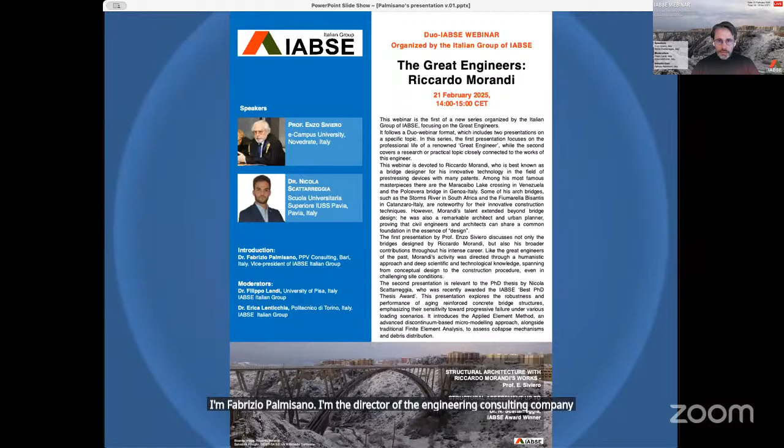The topic of this webinar is great engineers, and we will talk about Riccardo Morandi. This is the first of a new series of webinars organized by the Italian group of IABSE focusing on great engineers. The format is the so-called duo, so we will have a couple of presentations: the first relevant to the works of a great engineer, Riccardo Morandi, and the second relevant to a topic strictly connected to great engineers.

Today we have the pleasure to host Dr. Nicola Scattareggia, who will talk about his PhD thesis, which won the IABSE award for best PhD thesis in 2024. We also have the honor to host Professor Enzo Siviero, who will talk about the works and life of Riccardo Morandi. I will give you a short introduction of IABSE, and then I will leave the screen to the moderators, Dr. Filippo Landi and Dr. Enrica Lenticchia from the IABSE Italian group.

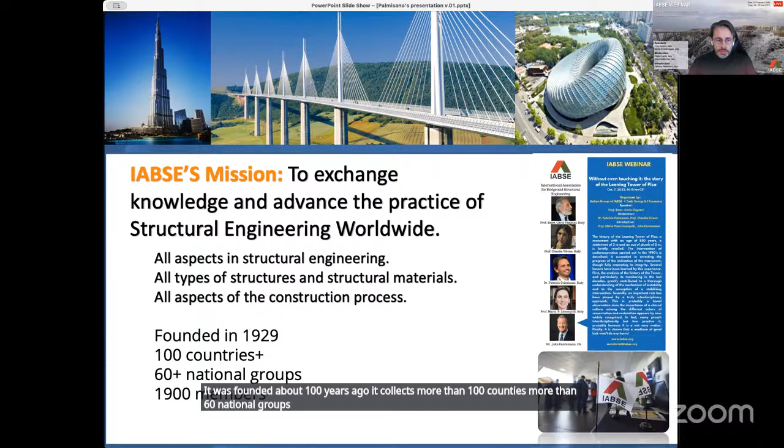The IABSE mission is to exchange knowledge and advance the practice of structural engineering worldwide. It covers all aspects in structural engineering, all types of structures and structural materials, and all aspects of the construction process. It was founded about 100 years ago, and it collects more than 100 countries, more than 60 national groups, and about 1,900 members.

The objectives are to promote cooperation and understanding among all concerned with structural engineering and related fields through worldwide exchange of knowledge and experience, to encourage awareness and responsibility of structural engineers towards societal needs, to encourage actions necessary for progress in structural engineering, and to improve and foster cooperation between organizations having similar objects.

This is a global association which has a local presence in national groups, and as I said before, we have more than 60 countries all over the world.

This webinar has been organized by the Italian national group of IABSE, the so-called IABSE IT. It was refounded almost 3 years ago, and its main activities are to coordinate new technical Italian task groups to discuss specific topics, to disseminate activities of the task groups in the journal of IABSE, in the bulletins, workshops, special sessions at IABSE conferences, and to have training activities such as this webinar, conferences. We've had our first conference last October, and technical visits.

The heart of the International Association is the so-called Technical Committee, who is responsible for the overall technical activity of IABSE and coordinates the committees relevant to the outstanding structure and paper awards, the commissions, the SEI editorial board. SEI, Structural Engineering International, is the official journal of IABSE, the bulletin editorial board, the Young Engineers Committee, and finally the new founded IABSE Academy.

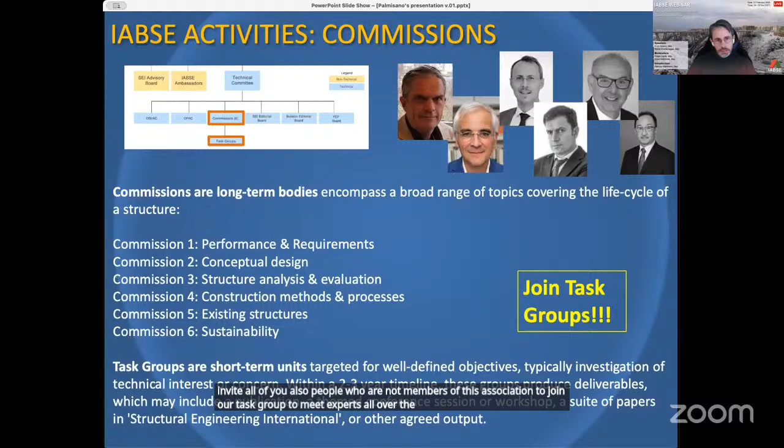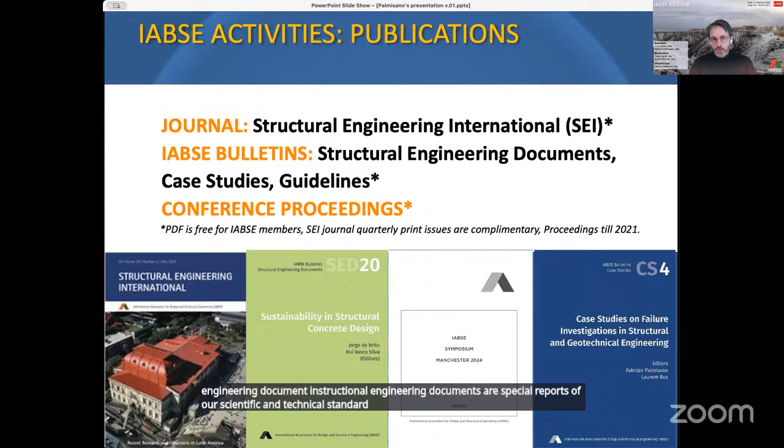IABSE has three kinds of main publications. We surely have conference proceedings, but also the official journal on structural engineering called Structural Engineering International, where we can find not only technical papers but also valuable scientific papers. We have IABSE bulletins, guidelines, case studies, and structural engineering documents, which are special reports of high scientific and technical standard, focusing on advancement in structural engineering.

On the IABSE website, you can also find the IABSE learning platform. For the time being, it is divided into 5 parts: one relevant to webinars like this, keynotes, lectures and courses, reports, and toolbox. IABSE is reorganizing the entire platform and adding some special courses that will be delivered, I hope, this year.

One important activity of IABSE is to disseminate the knowledge of structural engineering through the Young Engineers Program. The scope of this program is to liaise young engineers with conference organizers, advocating for IABSE through social media, and facilitating opportunities to bridge budding engineers with experts among the IABSE fellows.

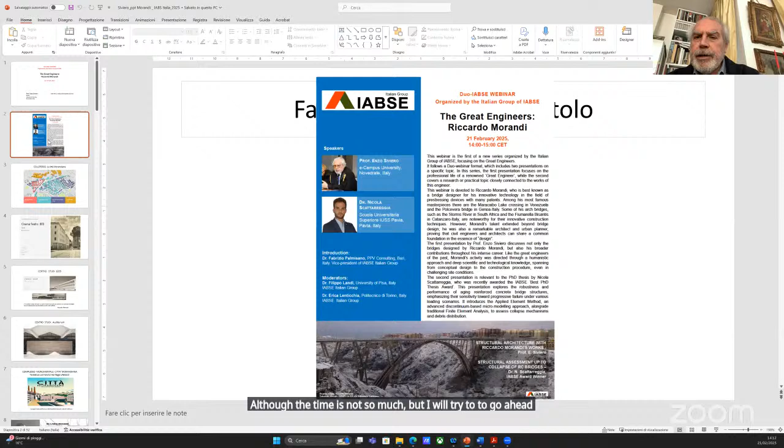Yes, you can go for the first slide. Riccardo Morandi is one of the most important bridge designers all over the world. Nobody knows, or few people know, that Riccardo Morandi was also an urban planner, and this is in Colleferro, what we call the Morandian city. I'm sorry because I had no time to translate it into English, but I would like to show with a few slides what Riccardo Morandi made in the field of buildings and urban planning. He was a kind of architect at that period. He worked between the two wars.

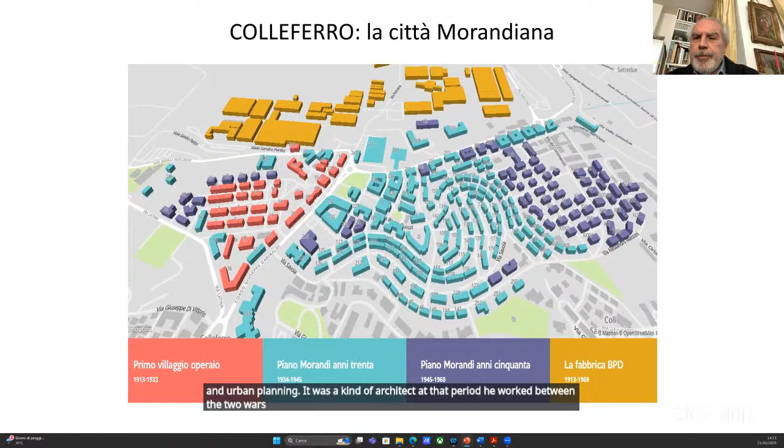Please go. This is just a cinema, a theater for Bombrini Parodi Delfino, which was a very important company. For this company, he organized a kind of worker housing for people to let them live in connection with the factory. He was also making some work during the war, and this is another problem.

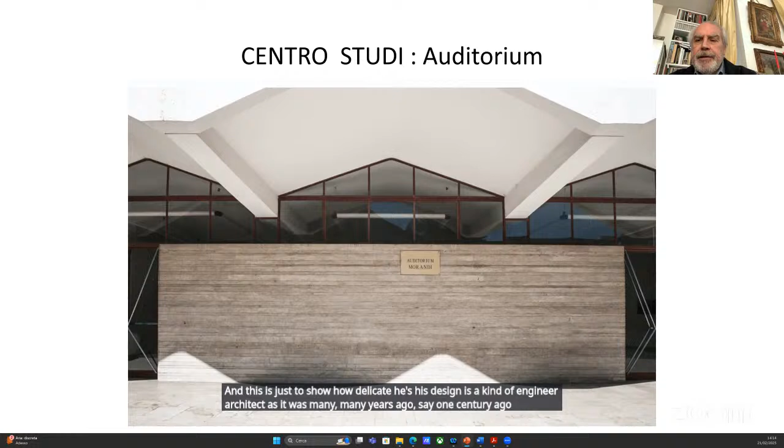Please, I would like to show some of the buildings he was making just right after the war. I don't enter too much, but during the war he was working so much. Next time, next please. This is just to show how delicate his design is. He is a kind of engineer-architect, as it was many years ago, say one century ago. After Nervi, I think Morandi is the most important one in Italy, together with some others, of course.

Next, please. Città Morandiana is now in the tentative list of World Heritage, so its importance for the social situation of the building is to be recognized. But the most important one is just...

Bridges. I show you some of the bridges he made in his life, please. This is Riccardo Morandi, he was sketching by hand, you know. This is also very important: when you design by hand, it means that your brain goes directly to the sketch. This is one of the sketches, please.

Another one is Riccardo Morandi. He was very old, with a bridge in Rome. But on the right-hand side, you have this Bisantis Fiumarella bridge in Catanzaro, which is also part of this seminar.

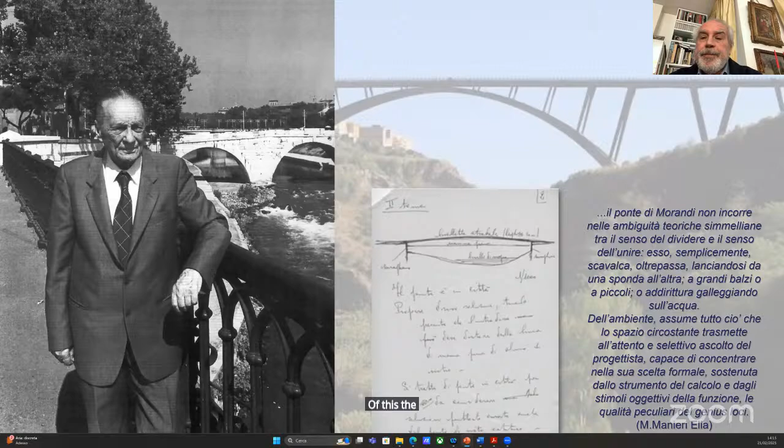This is the first bridge he made in South Africa. You see that the arch has something very peculiar because the standings are not vertical but somehow inclined. This gives an additional safety situation, but at the same time an architectural feature which is very nice.

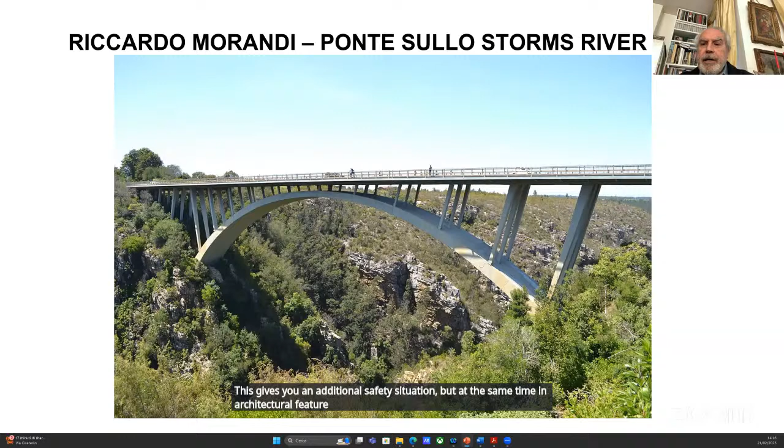You see here how he was building the bridges, because concrete arch bridges at that time needed scaffolding, which was very important. But in that case, he prefabricated the semi-arch and then inclined it, as you see here.

I have no time to discuss, but of course all these things without the instruments we have now and the possibility we have with computers was a very difficult task, because everything was almost made by hand. This is almost 60 years ago.

Another bridge is this one, which is a footbridge. Again, he worked with the semi-arch, moving from one side to the other. The form is a parabola, of course. You see on the right-hand side the bridge as it is finished.

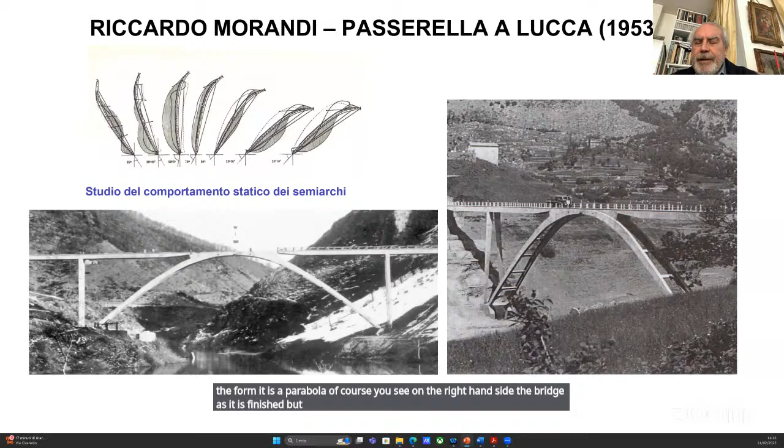What is interesting is that even when the water is there, you see the impression of the bridge is somehow very natural. This is one of the most important features of the design by Morandi.

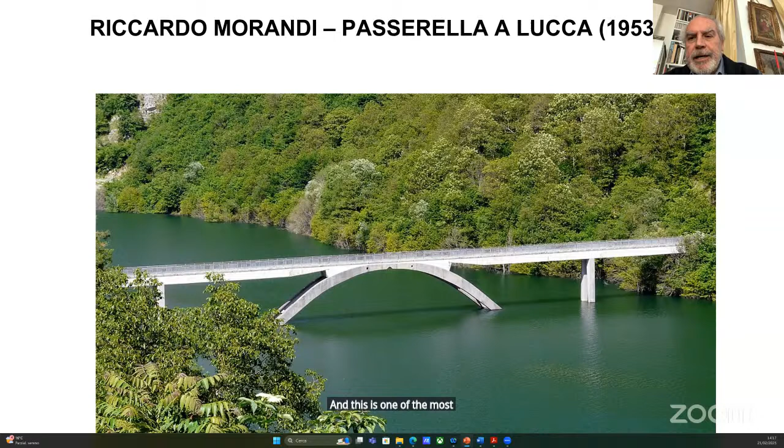You have here the Fiumarella, or Bisantis. Fiumarella is just the river underneath, and Bisantis is the person who promoted this bridge.

There are a lot of features we can discuss. One for us: you see the X elements, which are able to reduce the slenderness, and this is also something very important from an architectural point of view. At the same time, the structure shows the combination of engineering and architecture—I always say a bridge between engineering and architecture.

I myself have been dealing with this for 40, 50 years. Other views—I have visited this bridge a lot of times. I would say Catanzaro town is more important because of this bridge than for other features.

Just to mention how the arch is attached to the abutment: you have a bifurcation of the elements, and this shows also the bending moment organization, which is tension and compression. This is for my students—I was teaching bridges to architects, so I had to speak their same language.

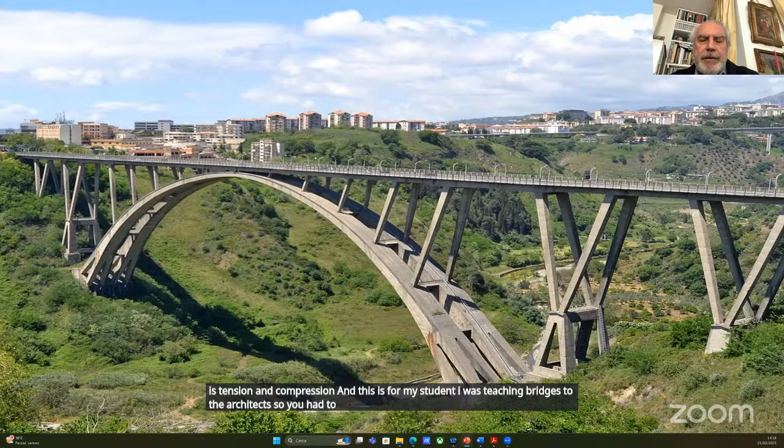You see the scaffolding, which is also a work of art—very important, a piece of art. Even the scaffolding, sometimes the execution is more important, during the execution, because nobody can organize in a very easy way the behavior of the bridge.

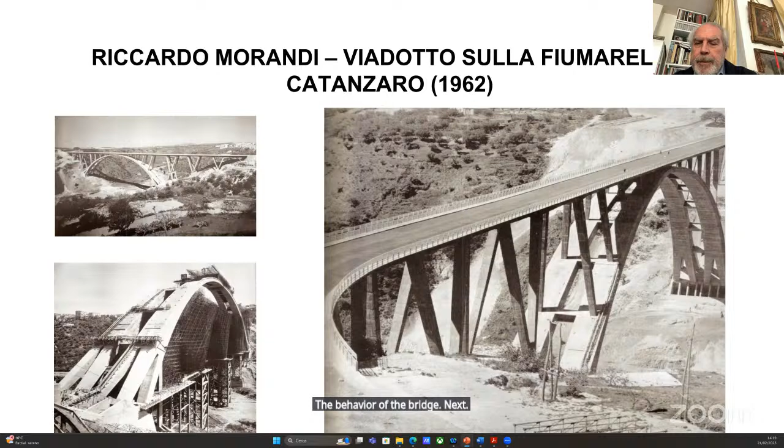Here you see details of the scaffolding, which, in my opinion, is like a picture. It's fantastic, I like it very much, because site work is, in my opinion, a very important feature. Every structural engineer should know how it works, how to erect things, and how the behavior is during construction.

This is maybe one of the most important bridges that Riccardo Morandi made. At that time, we are talking about around 60 years ago. The Italian contractors were working all around the world, and Morandi was working for the contractors.

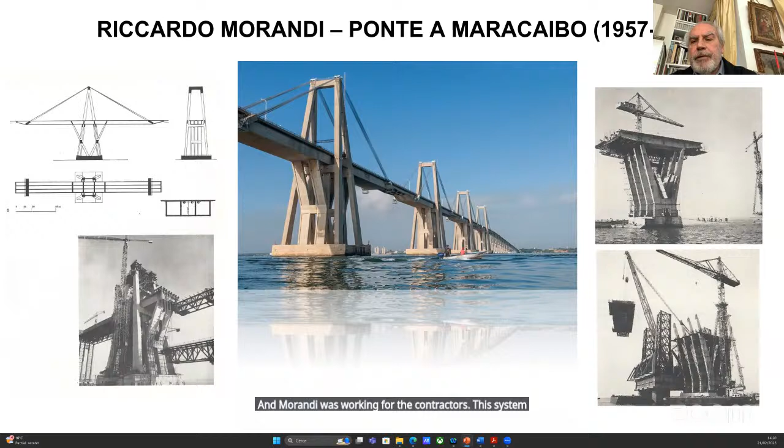This system is a peculiar situation of Morandi. Laguna, Maracaibo Lagoon—in that case, you have the cable stays, which are steel.

In other cases, we see he used steel, but embedded in concrete. This is a peculiar situation which gives some problems, of course, but at the time it was very, very cheap.

And we come to the Polcevera Bridge, which is well known not only because Genova calls it their Brooklyn Bridge, although there is nothing to do with Brooklyn, but because it has been demolished a few years ago after the collapse of that part. I said at the time that it was a murder of a bridge, because there was no real reason to demolish it.

This is another bridge, in Libya, in Cyrenaica, in Wadi el Kuf, which I know very well because I visited many years ago. It is the same system, but a little bit more span—it is 250 meters.

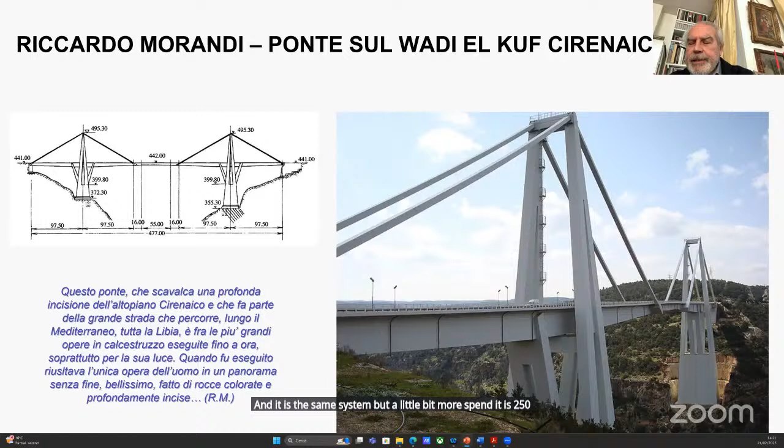A picture with color, because the sun is illuminating it, and the result is this one—it's a kind of monument in the landscape.

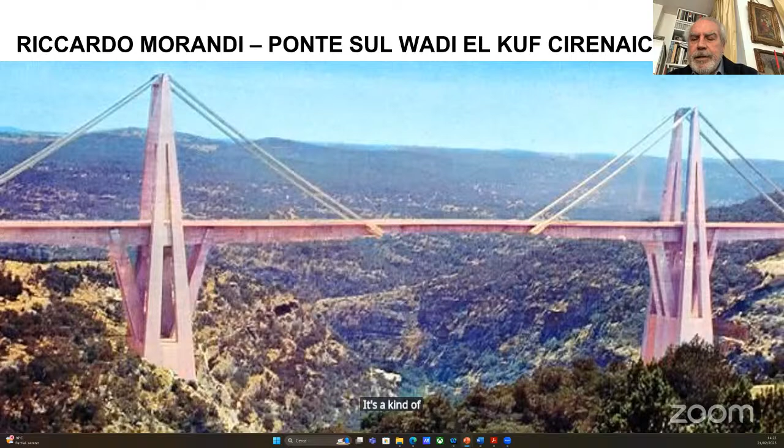You see the system: it's the cable in steel, then embedded in prefabricated elements in concrete, and then pre-stressed. This gives some problems for the injection of the mortar and so on.

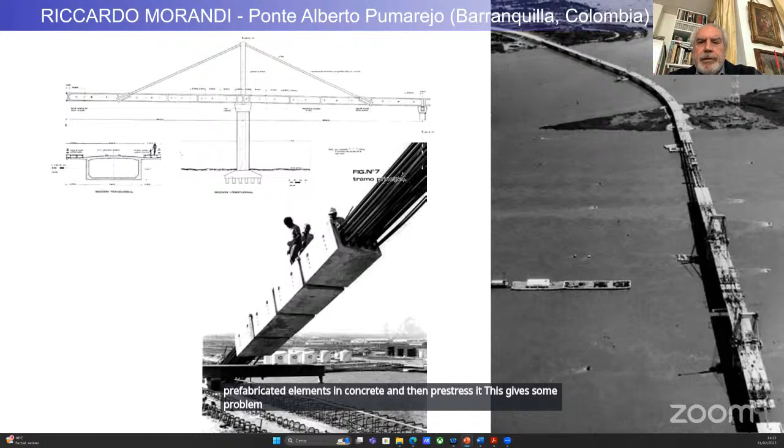Now we come to Polcevera. How was this built, I mean? This is the illustration in the newspaper when, in '67, it was inaugurated with the president of our republic at that time, Saragat.

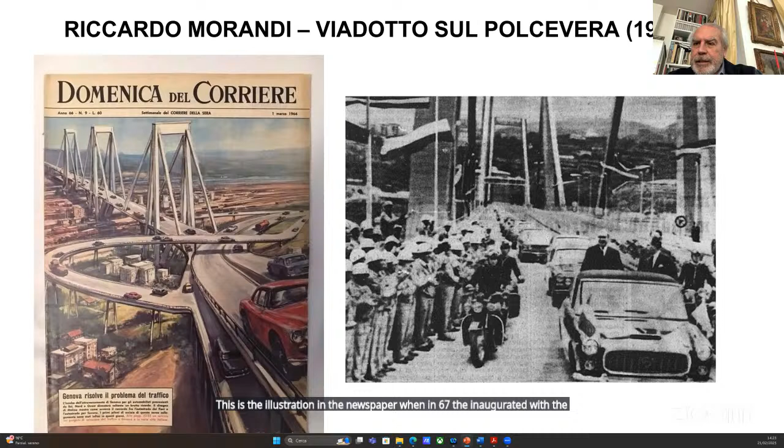Some detail, which is very peculiar, because there is not only the main span of more than 200 meters, but also an additional span of 70 meters approach with this V shape, which was unfortunately very interesting. The whole bridge was more than 1 kilometer, half with this so-called Morandi system, and half with this V shape, with elements partly prefabricated, partly cast in situ.

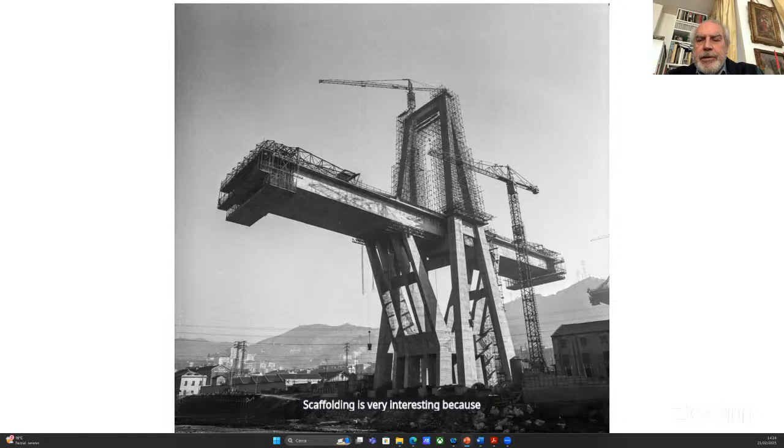Scaffolding is very interesting because initially it was only cantilever, without the tie elements.

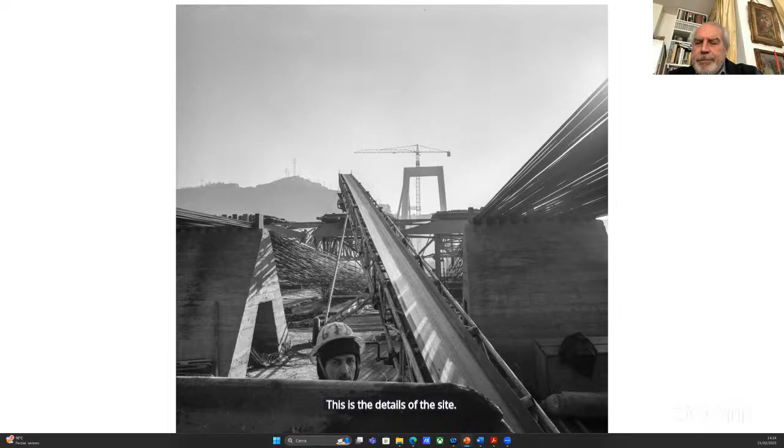I won't comment too much, I think we should move on quickly as time is running. These are details of the site work. Also problems with the concrete. This is the final design before.

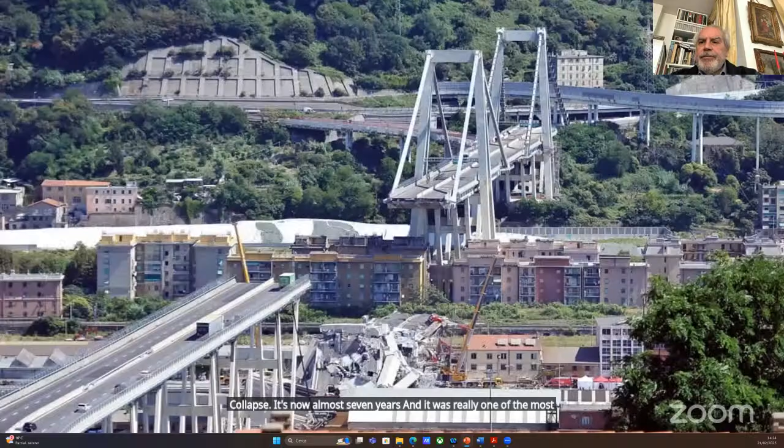We proposed to close the part which had collapsed.

I imagine this like Michelangelo's Creation, where you have the two fingers connecting, and this finger accepting another connection. This is our idea: the V shape, we change into another V shape to connect on the other side with the reverse V shape.

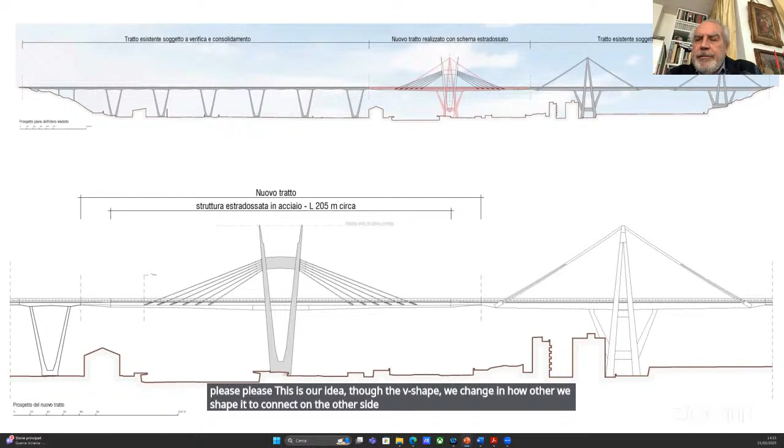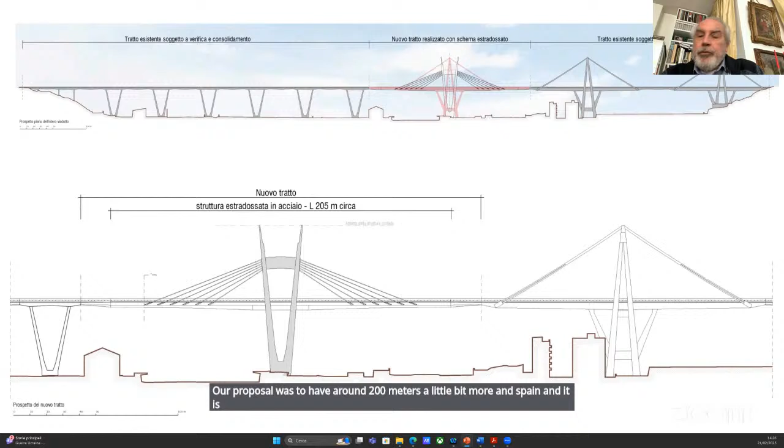Our proposal was to have a span of around 200 meters, a little more. We used steel, of course, because it was not possible to replicate the situation from 50 years ago.

I tried to condense this - it was for us something to show the transition from one part to the other, because my attitude personally, and what I teach my students, is mainly to devote an important part to the venustas, meaning the beauty of bridges, the architectural feature, design, landscape, and so on, not only the structural engineering. I know that in IABSE there is also quite a lot of attention to conceptual design, and conceptual design should not only be a structural design, it should be holistic, all together.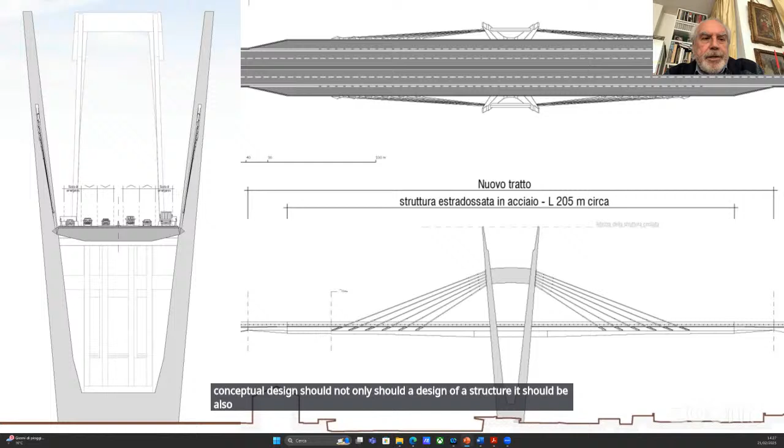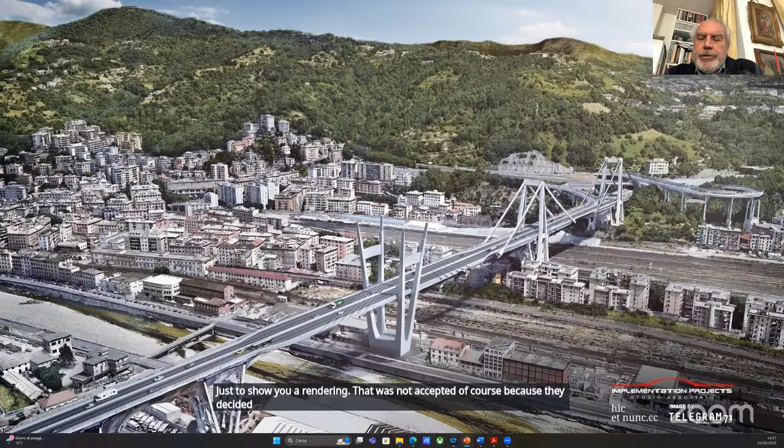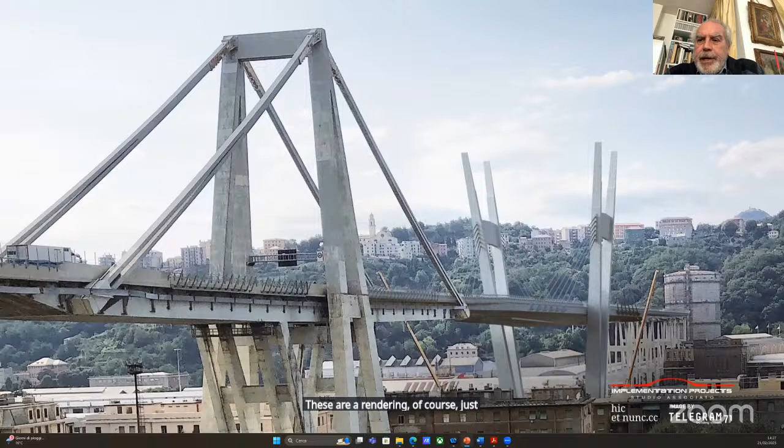These are renderings, just to show that we can combine one part with the other, so it would be considered at least as a kind of comparison. But the political decision was to demolish the bridge. Therefore, we made this effort just for history, for glory or not glory, I don't know.

Anyway, you can judge. And I think the most appropriate place to discuss this is IABSE. This is my point of view.

This is also very interesting because you open the arms, it seems that you are praying to God that nobody can repeat this.

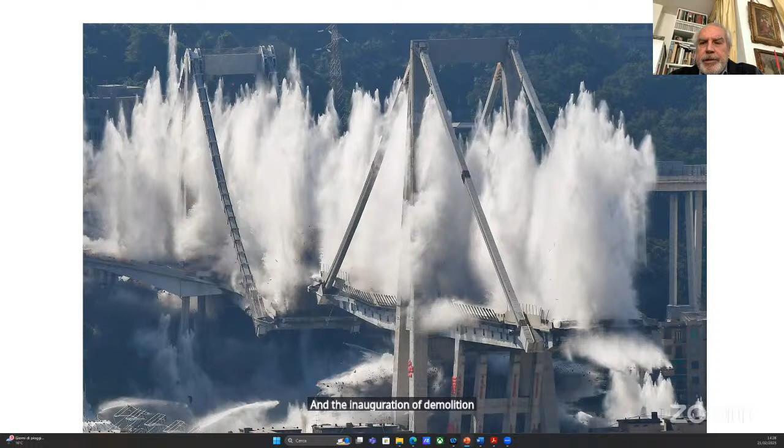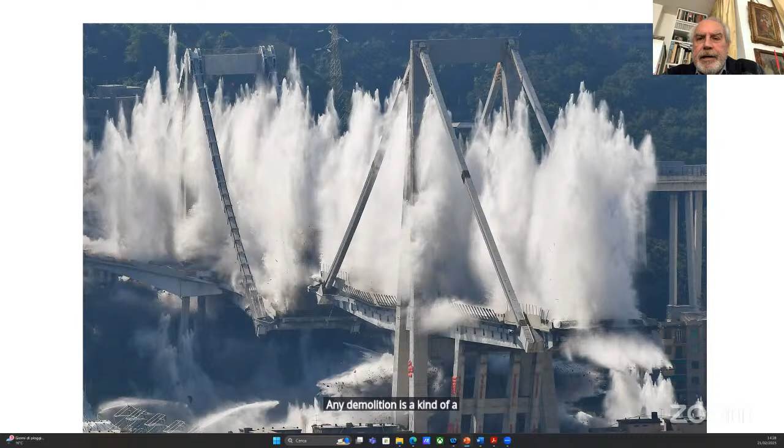This I worked on with my co-worker. This is what they finally found. They demolished the bridge, and the inauguration of the demolition by the politician was, for me, a kind of bad impression. Any demolition is a kind of losing our life, our heart. And this is the proposal of Renzo Piano, the original one.

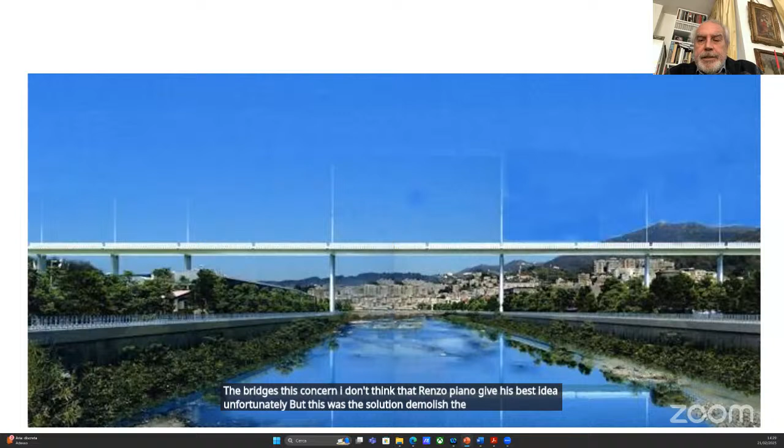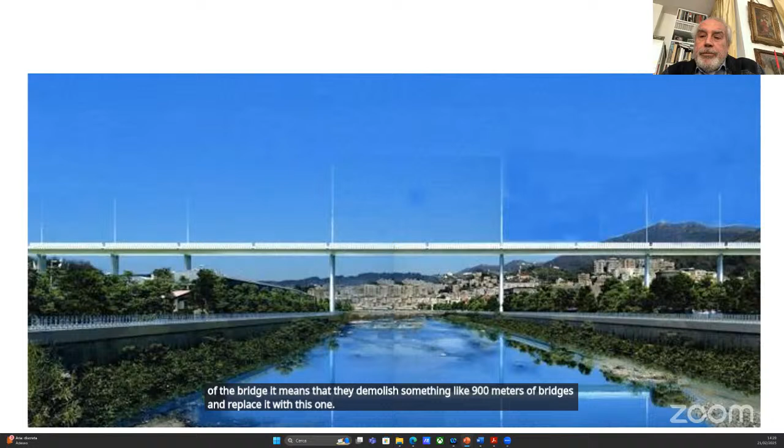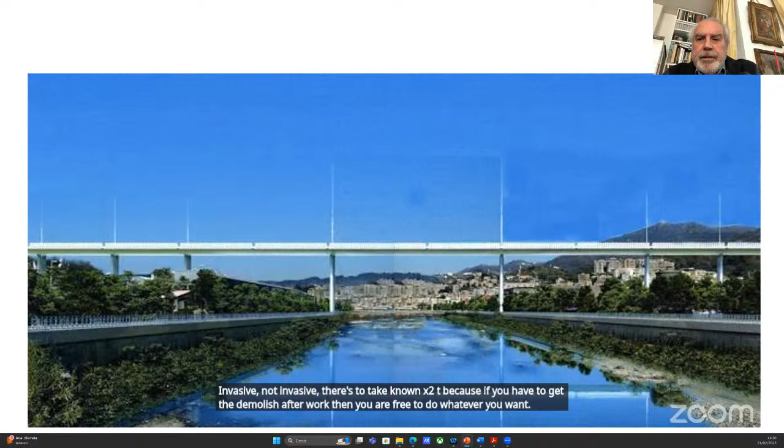But this was the solution: demolish the bridge, the existing part of the bridge. It means they demolished something like 900 meters of bridge and replaced it with this one. In my opinion, there was also another mistake in demolishing, because they could have had the possibility to investigate the bridge piece by piece. If they decided to demolish, before demolishing they could work with experimental tests—invasive, non-invasive, destructive, non-destructive—because if you demolish afterward, you are free to do whatever you want. They decided to demolish before any additional investigation.

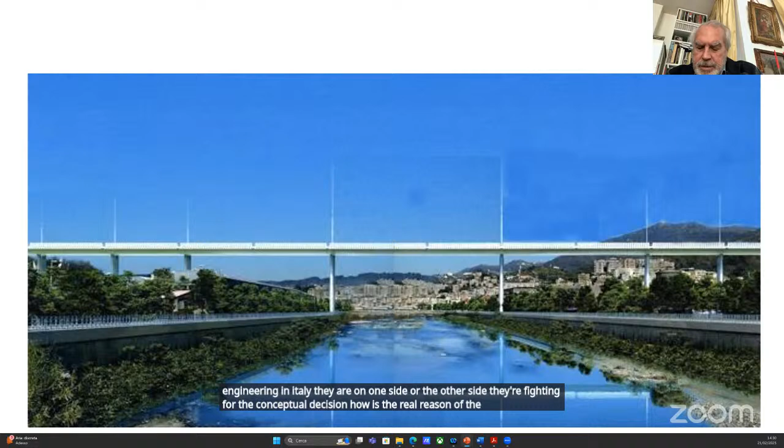Now we are in court, and I don't think they will get the final result within the next years, because all the most important bridge structural engineers in Italy are on one side or the other, fighting over the conceptual decision about the real reason for the collapse.

Just to remember, an Italian company, Delma, which is part of the Maltauro system, carried out a replacement and rehabilitation of the Wadi Kuf bridge. This is what they've done, and this could have been done also for Genova.

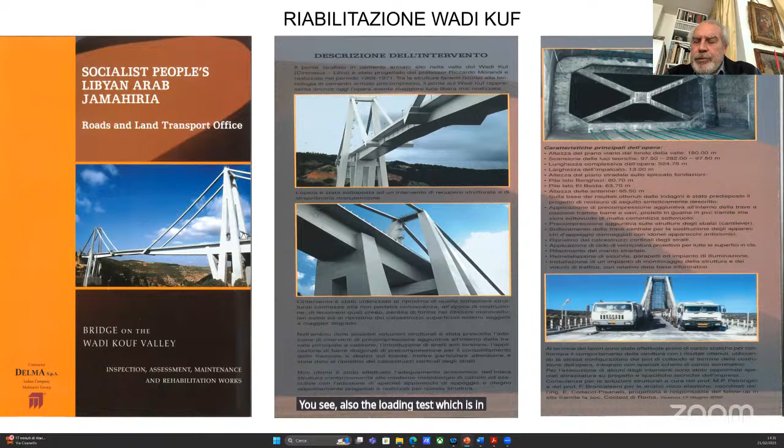It means they decided to demolish, although there was a possibility to completely revise it, also getting the seismic functionality, because in Italy, for 20-30 years now, we have had seismic concerns all over Italy. You also see the loading test, which in Italy is absolutely compulsory.

Now I show you the bridge, so-called Ponte San Giorgio, the San Giorgio Bridge. San Giorgio is the patron saint of Genova, designed by Renzo Piano. You can judge for yourself what the bridge is like—it's not bad, of course, but it seems to me a little old in the conceptual design.

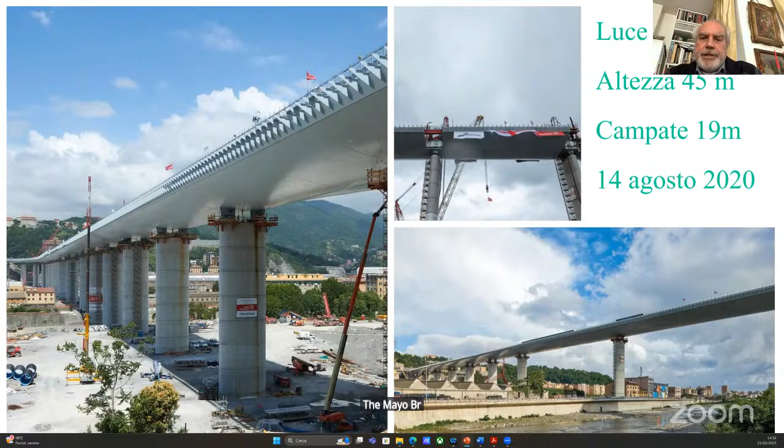And not very cheap, because the cost per square meter of this bridge is equivalent to the Millau Bridge in France. But you can imagine the difference between the two. But let's come back, it's okay.

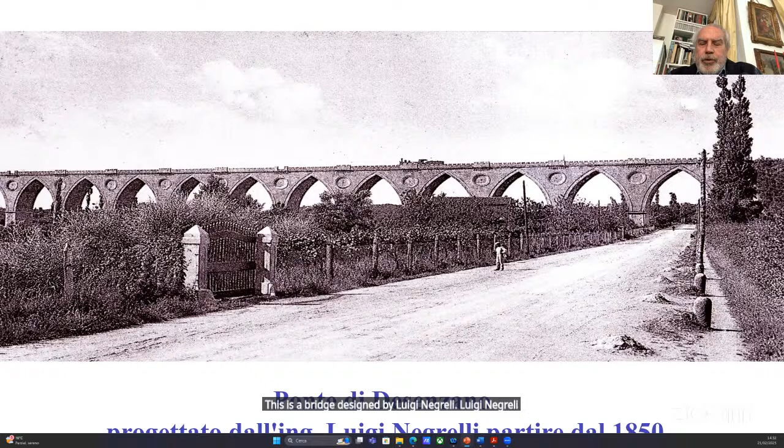We show you that in the past we had a similar situation. This is a bridge designed by Luigi Negrelli. Negrelli was born not far from Padua, in Veneto, and he was also a fantastic engineer. He was the first to have the idea for the Suez Canal—then the French arrived and built it. But this was his bridge in Desenzano, near Lake Garda, in 1850.

During the war, this is what happened: the bomb destroyed just two spans, and instead of repairing and restoring continuity, maintaining the quality of this design...

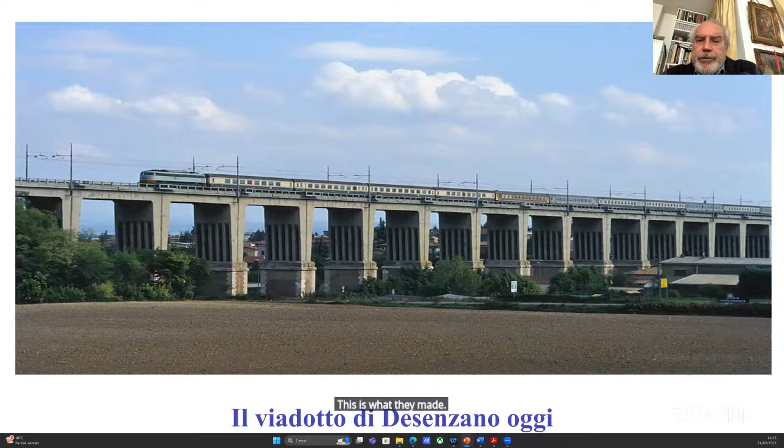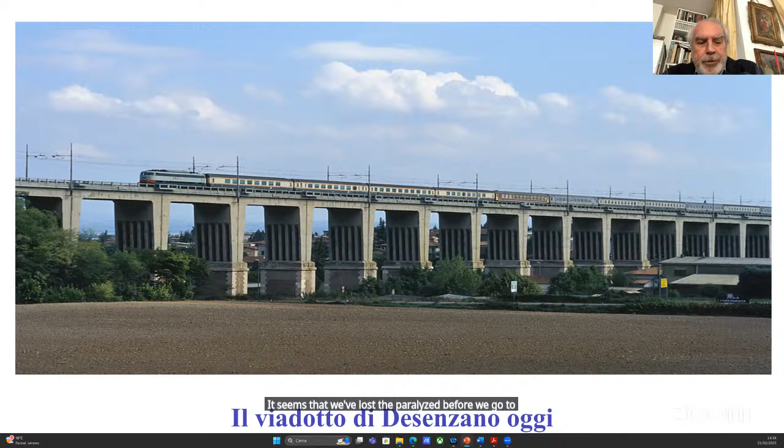This is what they made. I don't like to comment on it, but it seems to me that after the Second World War we lost the capacity of designing nice bridges—bridges that are impressive not only for their engineering, but also for landscape and architectural qualities, which is very important. If you compare this bridge with the other one, there is a kind of gorge. It seems we've lost paradise. We've gone downhill, but this is my impression, of course.

Okay, then. I'm sorry I had to run through this so fast, like in an Olympic marathon, but I tried to speak not only with my brain, but also with my heart. This picture remains a disaster, a psychological disaster. You have lost a nice bridge, and you have a common bridge instead. The only advantage of this new bridge is that it was designed by Renzo Piano. Okay, thank you so much.

Any question, I will try to answer, of course. And thank you for helping me, because I'm not so good with this mechanism, since I'm so old.

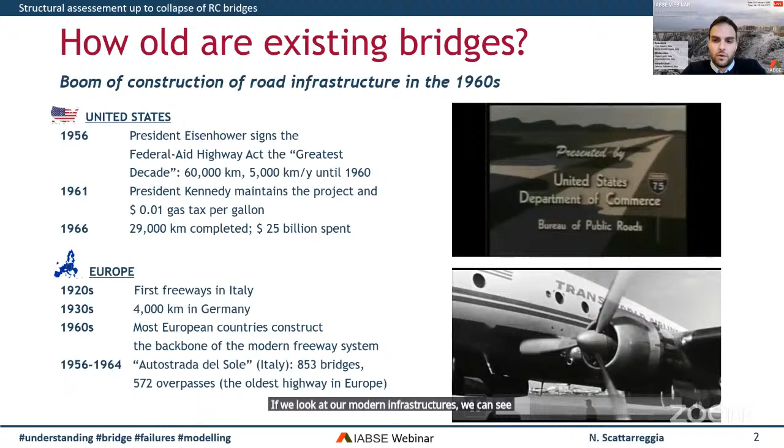If we look at our modern infrastructures, we can see essentially that the backbone of our infrastructures date back to after the Second World War, and this was a consequence of the economic boom that we had during the 60s. This happened both in the United States, thanks first to the action by President Eisenhower and later President Kennedy, but a similar thing can be also observed in most European countries, among which my country, Italy.

As a result of the construction of these bridges during the 60s, nowadays many of these bridges are more than 50 years old.

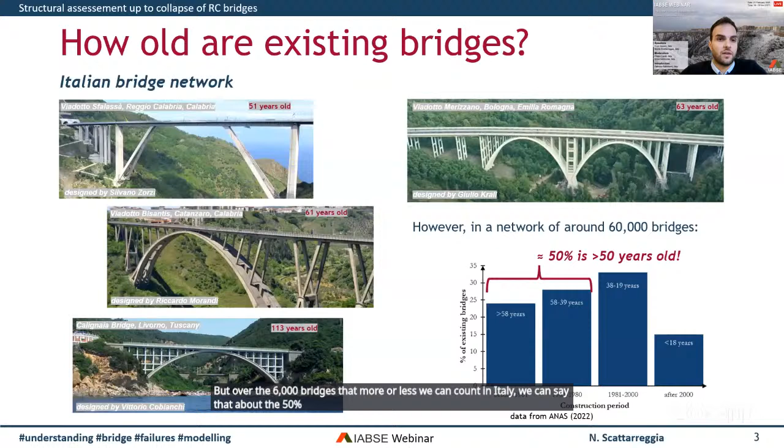If we focus on Italy, we can see beautiful examples of bridges that have been constructed during such period, as you can see in this slide, and also as shown before by Professor Siviero, specifically referring to the work of Professor engineer Riccardo Morandi. But over the 60,000 bridges that we can count in Italy, about 50% of these bridges are more than 50 years old.

As a result of their natural aging in combination with a non-uniform management strategy and the effect of climate change, as highlighted also by the collapse of the Morandi Bridge presented before, we observed many bridge collapses that prompted the need to pose attention to the safety of existing bridges. Indeed, this has also been highlighted by recent guidelines issued in 2021.

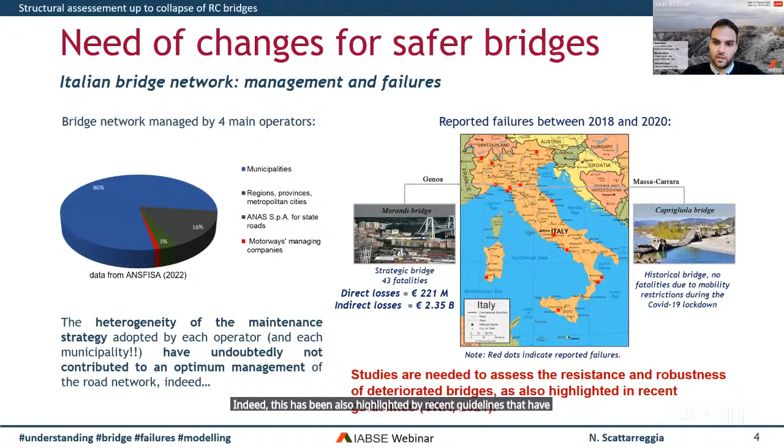It was 2 months after the failure of the Morandi Bridge that I started my PhD, and it was at that time that I decided to dedicate my doctoral studies to analyzing and understanding bridge failures.

But at that time, there was a major question: why and how we can do failure assessment. Of course, we have some needs when we think about existing bridges, among which the importance of identifying hidden deficiencies and how these deficiencies and defects can impact the residual capacity of existing bridges, explicitly considering their robustness.

Another necessity was to try to assess the resilience and resistance of these bridges when subjected to exceptional, undesigned and extreme loading scenarios, as well as the influence of deterioration, and also because the analysis of collapsed structures may help to prevent future failure.

When we deal with collapse assessment, essentially we usually rely on structural analysis and the use of finite element modeling. But finite element modeling belongs to the family of continuum-based techniques, so they pose some limitations when dealing with the collapse assessment of structures, where we can expect to have separations within the structures and also collisions.

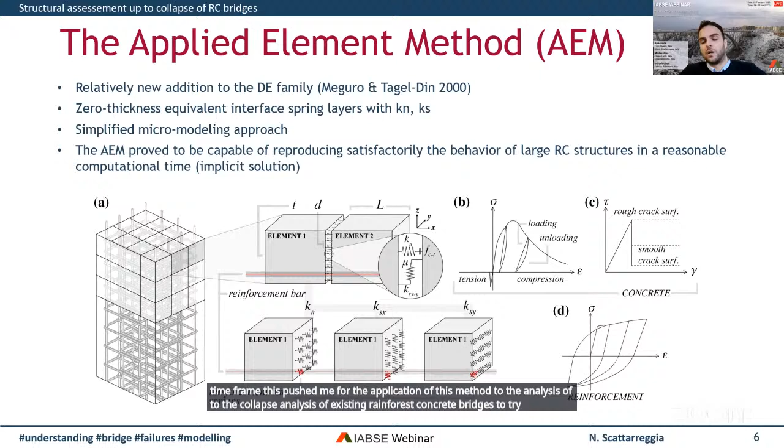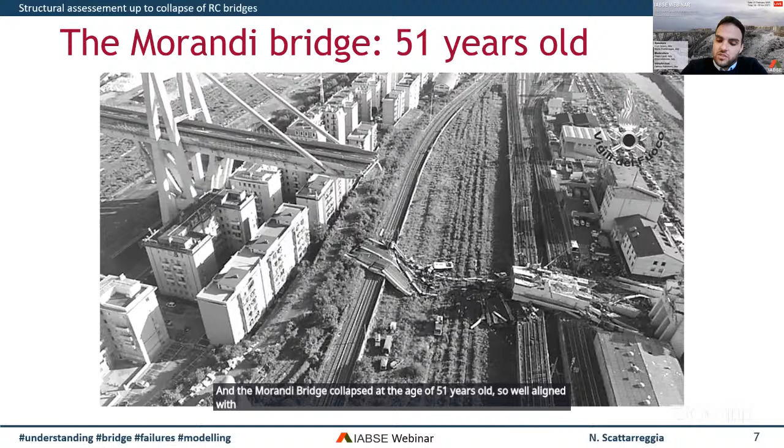One of the case studies considered has been exactly the Morandi Bridge, which has already been illustrated by Professor Siviero. The Morandi Bridge collapsed at the age of 51 years old, so well aligned with the age of most of our operating bridges in Italy.

I will skip the presentation and description of this bridge now, because Professor Siviero already described it. But I want to say that this masterful piece by Riccardo Morandi represented a key infrastructure for the Italian road network, and we know it was designed in the early 60s.

So I want to say that this structure was masterfully designed by Riccardo Morandi, but according to the knowledge of those times.

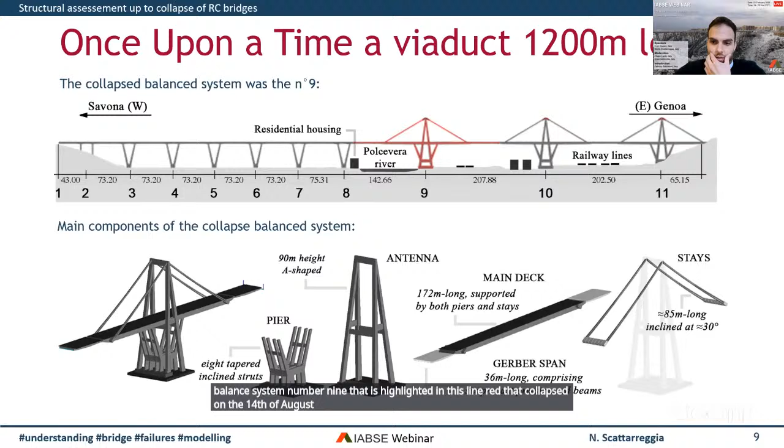Here you can see also the full schematic of the bridge, and it was again the balance system number 9, highlighted in the slide in red, that collapsed on the 14th of August 2018. I will not discuss the details.

On this bridge, I spent a lot of time. I would have a long story to tell you about the studies I carried out since the aftermath of the collapse, because initially we did some preliminary studies where we understood, even before the publication of the video recording the collapse, that the cause was associated with the failure of the stay.

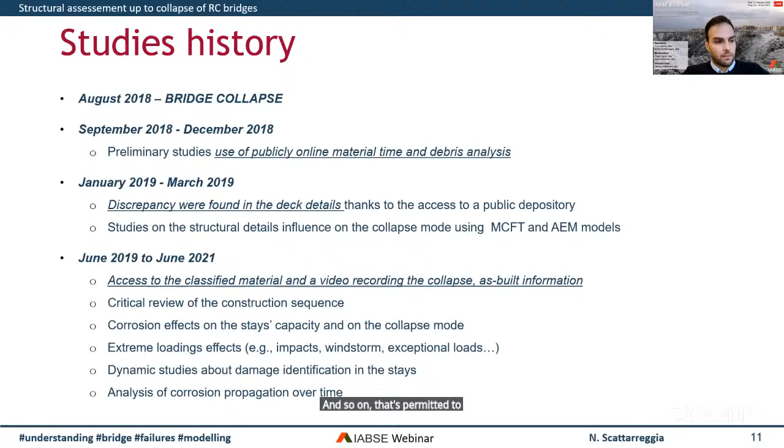Later, in addition to the material that was publicly available, I also had access to classified material and the video recording the collapse, along with as-built information about the structural details, materials, and so on, that permitted me to build numerical models faithful to reality.

For this case study, I want to highlight the importance of the modification of structural details. What was interesting was that a minor modification in the cable layout along the deck of the bridge would have caused just a minor influence on the torsional capacity of the bridge itself, but this would have caused the migration of the critical failure section.

As you can see in this finite element modeling of a portion of the bridge, there was a switch of the critical section.

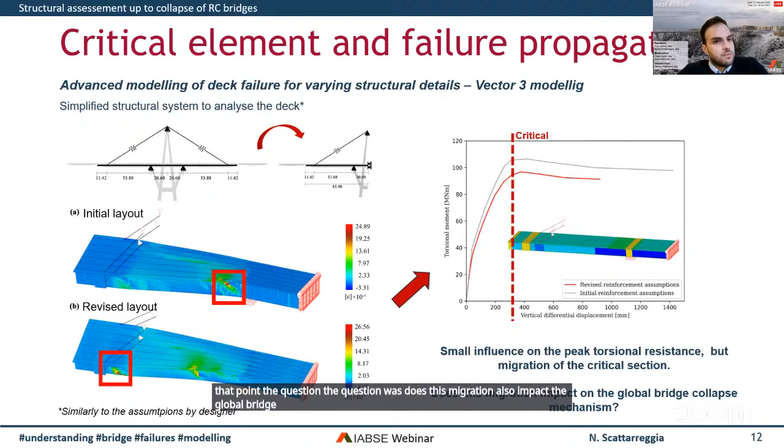So at that point, the question was: does this migration also impact the global bridge collapse mechanism? Because we are thinking about the collapse assessment of these bridges.

The analysis showed a relevant impact of as-built details on the collapse mechanism of the deck, consistent with what was predicted by the finite element modeling shown in the previous slide.

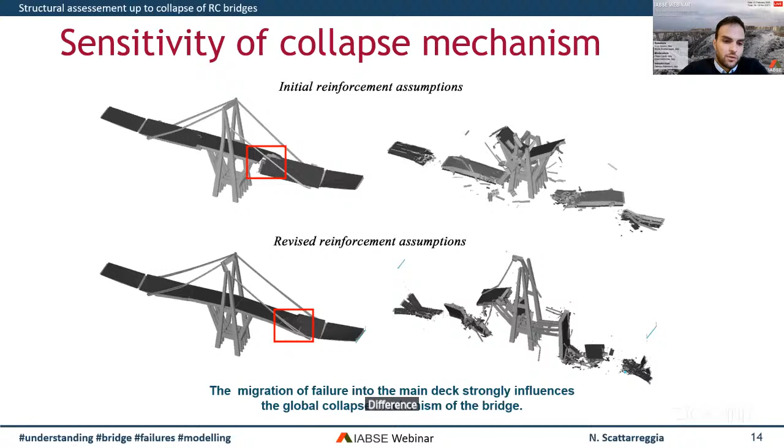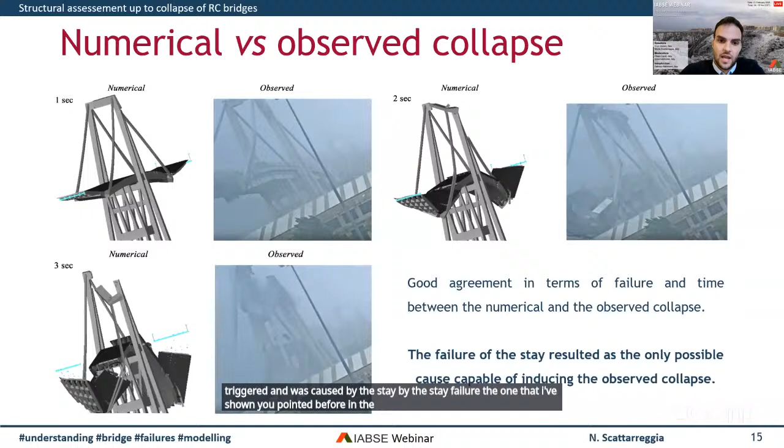At that point, I was trying to go more in depth, to understand why the stay failed. Among all the other possible loading scenarios that I have explored, in this presentation I would like to talk about two of them. Specifically, what we clearly knew was that at the time of the collapse there was a windstorm, and also a heavy truck was passing on the bridge, transporting a heavy steel coil.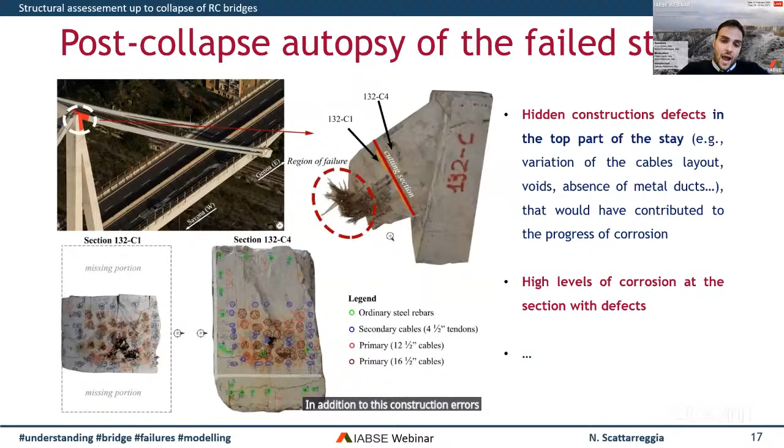In addition to that, the autopsy of the failed stay also showed that in the top part of the stay, where it failed, there were hidden construction defects. Indeed, as you can see from the figure, the cable layout was not the one designed by Riccardo Morandi. There were voids present, the cable layout was congested, and so on. In addition to these construction errors, high levels of corrosion at that section were also detected.

Now I'll try to speed up a bit, but essentially in this slide you can see that the geometry layout would have a relevant impact on the axial force bending moment capacity of the stay. Indeed, the green one, corresponding to the as-built details, is rotated towards the north with respect to the blue one, which is the capacity domain associated with the as-designed details.

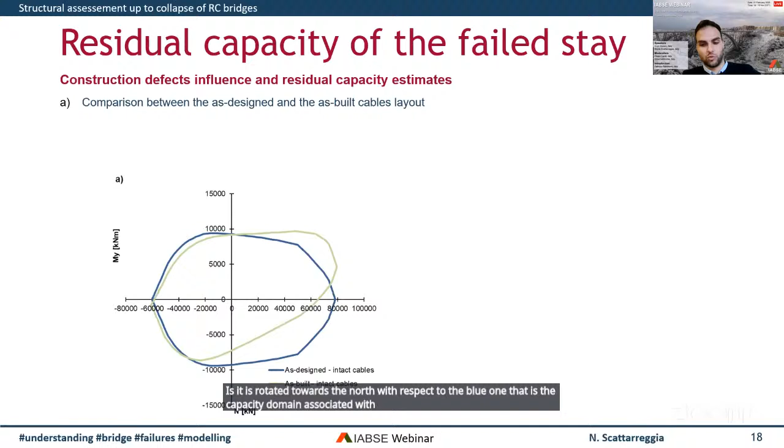In this slide, you can instead see the huge impact, the significant reduction of capacity due to the deterioration of the cables, mainly associated with corrosion. You can see there are two reduced capacity domains, essentially because they were based on two different ways to assess the residual area of the cables composing the stays.

And then later, between the two possible estimates I'm showing you, the most likely capacity has been identified through a back analysis approach, considering the loads that were experienced and supported by the bridge a few months before the collapse. So in this way, the study found that essentially the green curve represented the best estimate of the residual capacity, comparing these two possible estimates with the permanent loads acting on the bridge on the day of the collapse, plus the typical wind velocity usually recorded in that area.

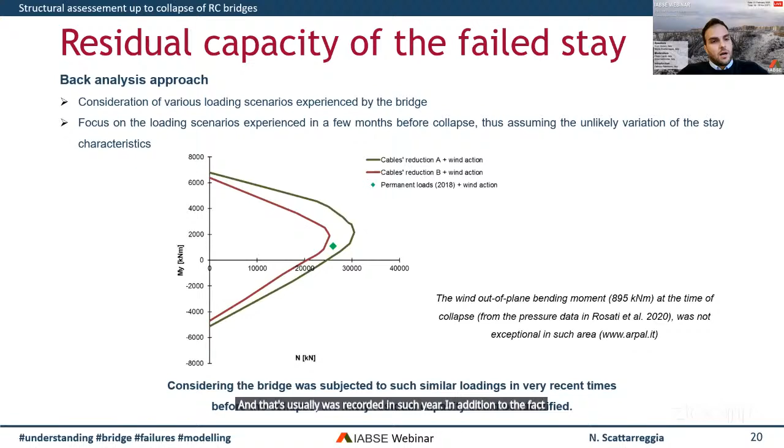In addition to the fact that we had a reduced residual capacity, I also explored the potential of a steel coil impact on the steel deck. Indeed, this was one of the different hypotheses that have been formulated. I want to say that about this potential triggering factor, there is no evidence that this kind of event happened, but I want to say that this kind of incident can occur, as you can see in the bottom part of this slide.

This was important to study because, according to initial estimates carried out by Professor Calvi, the increment of force produced by such an impact was sufficient to produce a demand exceeding the residual capacity of the stay as estimated previously.

Based on this, by using advanced applied element models, I investigated the potential force generated by an impact of this type, studying different sources of uncertainty associated with the truck velocity, position, and so on.

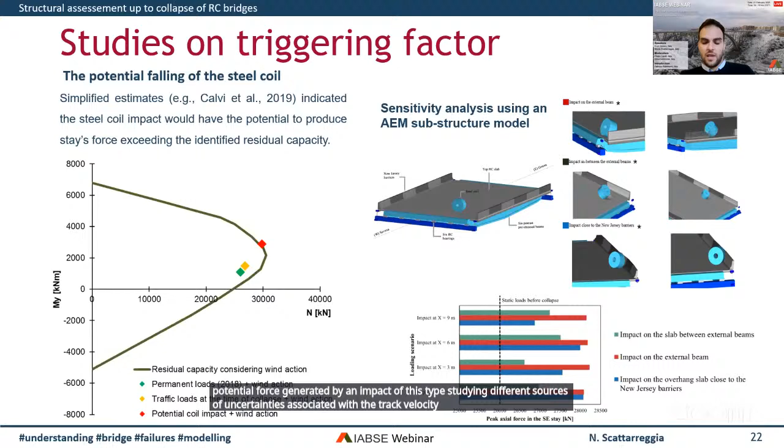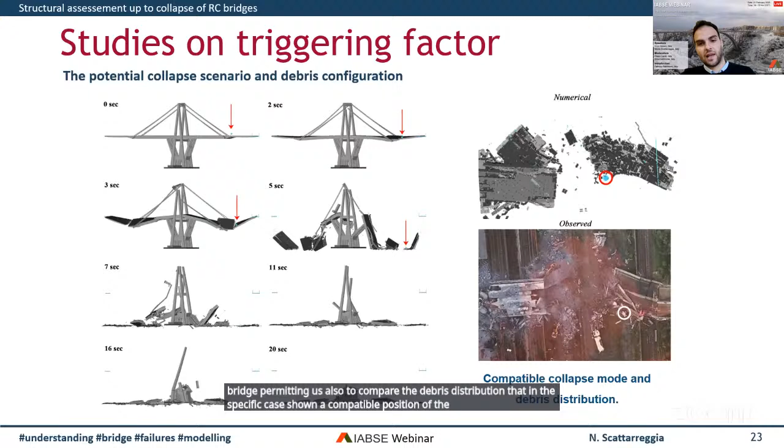Later, further analyses were run using the global bridge model, simulating the failure, the falling of the steel coil, and the impact in a specific position along the bridge. What is important about this slide is that this kind of modeling permitted us to reproduce the complete collapse sequence of this bridge, also allowing us to compare the debris distribution, which in this specific case showed a compatible position of the debris between the numerical and observed results, also in terms of the position of the steel coil.

Other studies have also been performed to show whether strong thermal gradients would have the potential to introduce an action capable of exceeding the capacity.

So now I want to very fast pass through another case study that has been studied. I don't know how much time I still have. I think a couple of minutes.

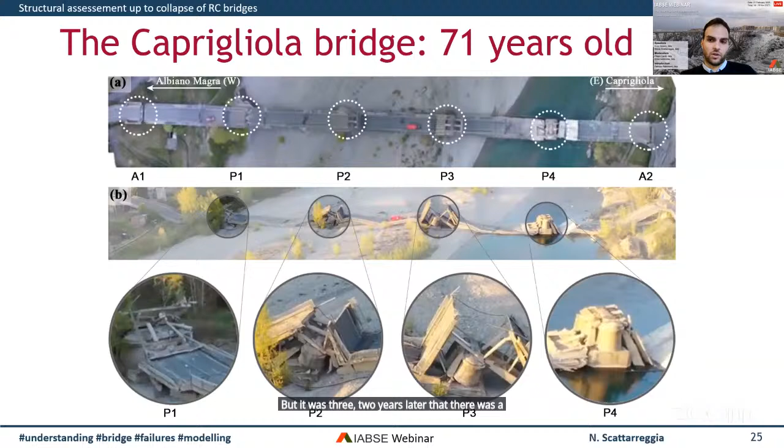But it was two years later that there was a collapse of another very important bridge, the Caprigliola Bridge, a multi-span bridge. Also this bridge has a beautiful story. It was first built at the beginning of last century, and it has been bombarded by Germans during the Second World War, and it was rebuilt in the 40s.

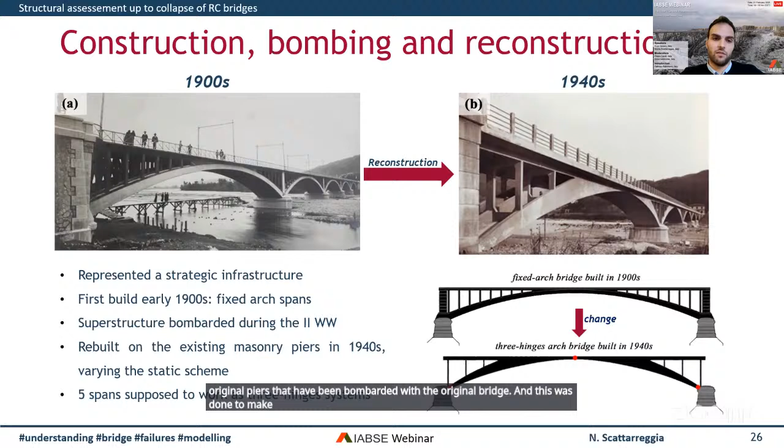It is important to say that during the reconstruction, there was a major change from a fixed arch solution to a three-hinge solution, and this was done to preserve the original piers that had been bombarded, and to make possible the accommodation of rotation and adjustment of the piers that were bombarded.

Similarly to the Morandi Bridge, in this case I built an applied element-based model with the aim to simulate different loading scenarios and understand the response of this bridge until collapse. I have done many validations of the model, as I did for the Morandi Bridge, but I didn't have the chance due to time constraints to show them in this presentation.

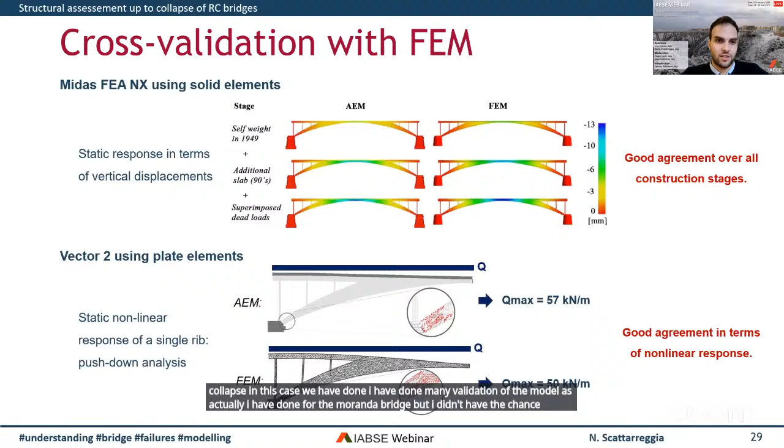With this model, I took into account different sources of hazard associated with natural factors, so hydraulic factors at piers, erosion, scour, the presence of slope slippage on one side of the bridge, material deterioration, damage accumulation due to overloading, specifically with reference to the deck enlargement in the 90s, the presence of past earthquakes, but also the effect of construction errors with the variation of the dimension of the concrete hinges.

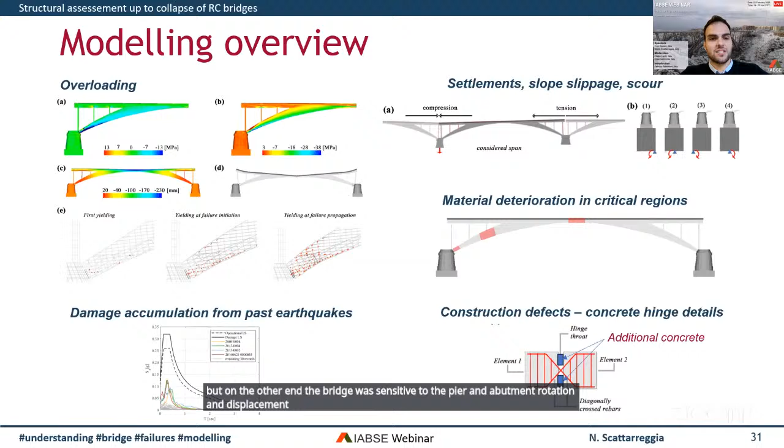I have implemented many models and frameworks to investigate these scenarios, and I want to summarize that there were no major problems associated with overloading, damage accumulation, and material deterioration. But on the other hand, the bridge was sensitive to pier and abutment rotation and displacement, as well as to the physical dimension of the concrete hinges.

As a result, the presence of slope slippage on the Caprigliola side of the bridge, the overloading coming from the addition of the slab to enlarge the carriage, in combination with a reduced rotational capacity at the concrete hinges due to a reduction of the throat of the hinges, it could have been possible to have the failure in one of the spans of the bridge.

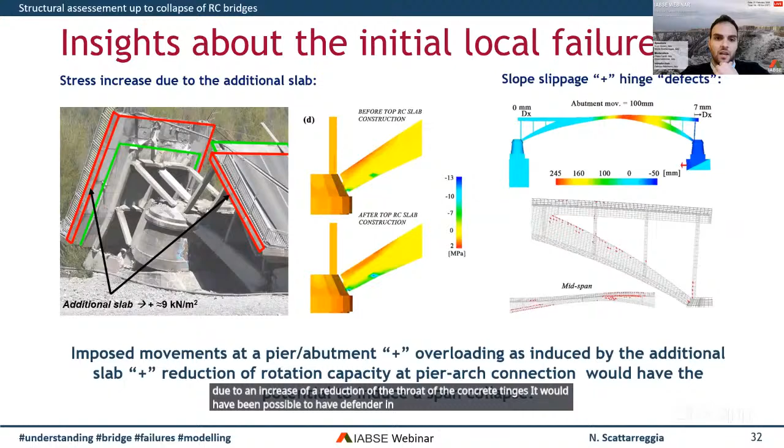I'm concluding. So I want to say that the numerical method adopted to simulate the structural response of these bridges until collapse has shown that as-built structural details, as well as changes in loading and material during their life, can have a relevant impact on the structural response.

The applied element method has the capability to deal with both standard and non-standard loading scenarios, and thus can be used to estimate the robustness of existing complex structural systems from the initial elastic response until the debris configuration. This may represent a valuable guide for inspection and monitoring, and also to guide intervention and retrofit for risk mitigation of existing bridges.

For the two case studies, and I'm concluding, I want to say that the innovative idea by Morandi of introducing only four main post-compressed stays seemed ingenious and effective, with no doubt, but combined with construction errors and the consequent, I would say, non-visible material deterioration through its life, rendered this kind of structure more vulnerable to potential exceptional loads.

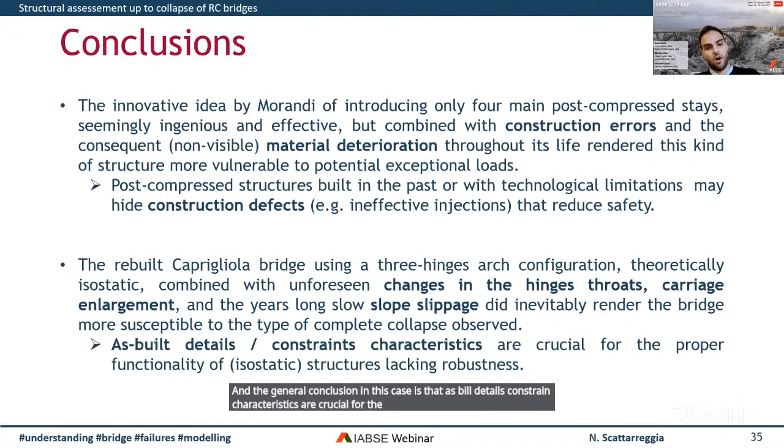For what concerns the multi-span arch bridge, the rebuilt Caprigliola bridge using the three-hinge arch configuration, theoretically isostatic, when combined with unforeseen changes in the hinge throats, the enlargement, and the years-long slow slippage on one side of the bridge, did inevitably render this bridge more susceptible to the type of complete collapse observed. The general conclusion is that as-built details and constraint characteristics are crucial for the proper functionality of structures lacking robustness. I have concluded, and here are some of the references of the studies I've presented.

I'm sorry if I took a few minutes more. Thank you for your attention.

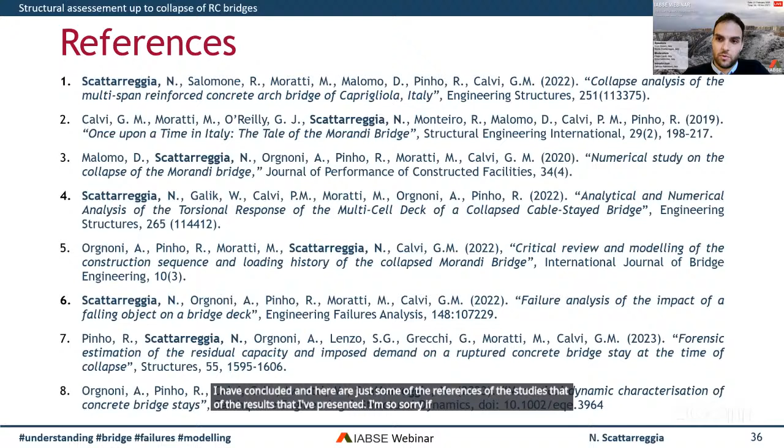Thank you, Nicola, for your interesting presentation. We have some questions from the audience, also for you, Nicola. There is one question about how you trigger the collapse in the applied element model. Is it element removal or maybe material weakening?

Thank you for the comment, so I can say more about that. Initially, in the preliminary studies, we induced the failure of the stay, so the answer is element removal. But later, in the studies I showed, for instance the simulation of the collapse induced by the falling of the steel coil, that was actually just a consequence of the demand generated in the stay, in the critical section, due to the falling of the steel coil on the bridge deck.

There is another question for you regarding how concrete hinges were formed in concrete. In steel bridges it can be done easily, but for concrete structures, how? I'm sorry, I didn't understand the first part. It's about concrete hinges, how they were modeled, I think. That is the question from the audience.

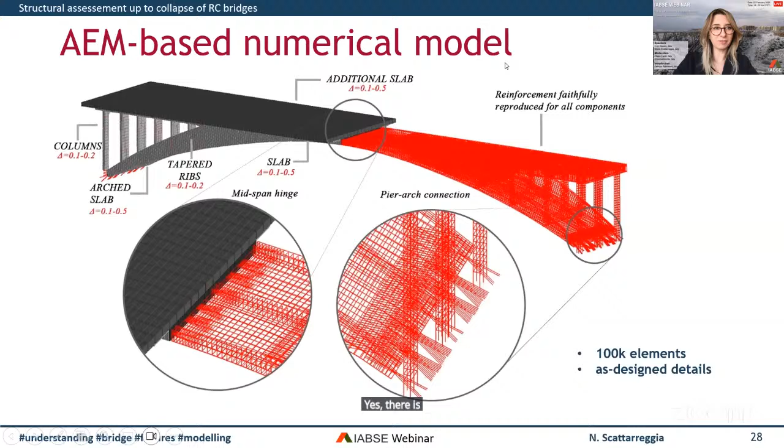I think there is another question, from Professor Siviero. Yes, there is a question for the presentation of Professor Siviero, by Caterina Caffari. I'd like to ask Professor Siviero if institutions ever considered building a new bridge near the collapsed one, leaving the remaining part of the collapsed bridge to support the construction of the new one, plus give time to do proper consolidation and allow all kinds of tests to detect the causes of collapse, as you said, Professor.

And in future years this would have allowed tests and collection of inspection data that are fundamental for research in pre-stressed concrete bridges, predictive maintenance, and avoiding demolition costs, and so on. At the same time, the new bridge would be used to quickly restore the interrupted traffic, ensuring up-to-date safety standards.

It's a long question, but no, unfortunately it was not taken into consideration. There are a lot of faults in this situation. First of all, they made a kind of tender which was a false tender, because they decided immediately to destroy the bridge and make a new one, designed by Renzo Piano. This is very clear now. Nobody really took into consideration keeping the bridge as it is.